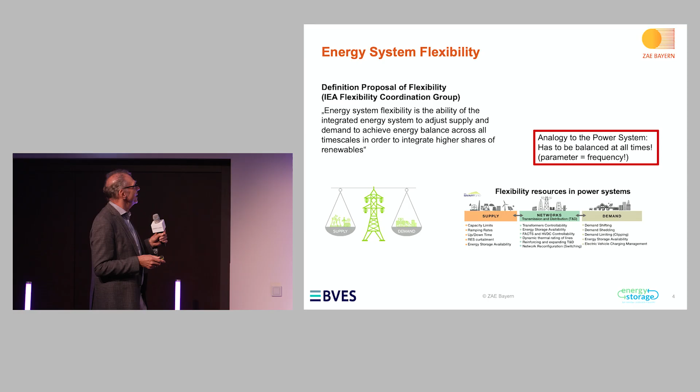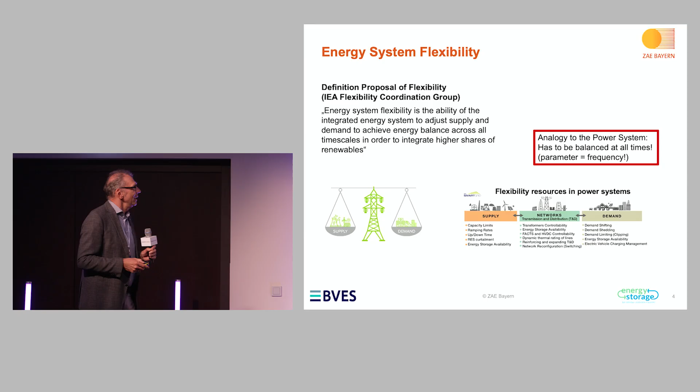But now I want to talk a little bit about flexibility and storage in the system. Actually, I'm leading a group in the International Energy Agency about flexibility in the energy system, and we try to have a kind of definition for flexibility. And it says energy system flexibility is the ability of the integrated energy system to adjust supply and demand at all times and achieve an energy balance across all time scales in order to integrate higher shares of renewables. So that's very much in line with the definition of flexibility in the electricity sector, where you also have to balance it all the time.

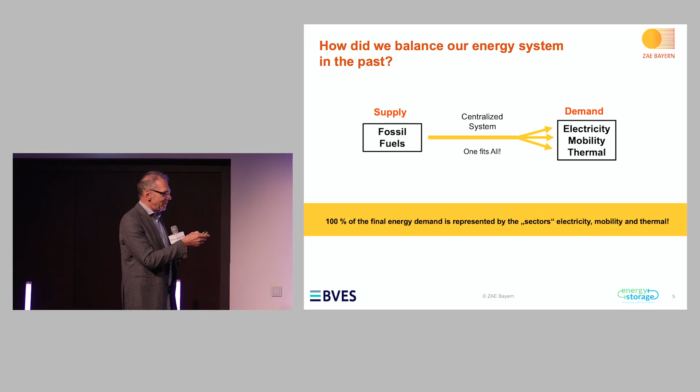In former times, it was quite easy because we had a system which was based on fossil fuels, so one solution fits all, centralized systems in order to provide what is needed in the demand sectors here, electricity, mobility, and thermal. In the future, it's much more complex. We will have renewable energies, and renewable energies also have fluctuations on the supply side, and then we have PV and wind, which is probably the main input in the future, but we have also others. And so that means we have to have decentralized systems. We have to provide these streams for the demand sectors. And the demand itself is also fluctuating. So that means a huge diversity to provide actually what is needed.

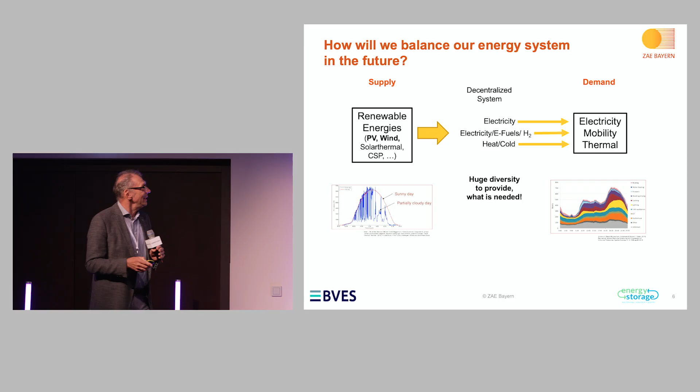So if we are not able to provide what is needed at that time, at that place, we have possibilities for flexibility. We can adapt the supply, but that is difficult if you talk about renewable energy sources. So they do what they want. And we can manage the demand, maybe. Also, this is limited. And then there are three things we can do in between. We can change the location. So this is about, for example, the electricity grid. So somewhere else you might need energy at that time.

We can have a shift in time. That is exactly what we talk about here today. That's storage. Or we can have a shift in the energy form, and I will talk about that a little bit later. So we can transform, let's say, electricity into heat. So this is power to heat or power to fuels and other transformations.

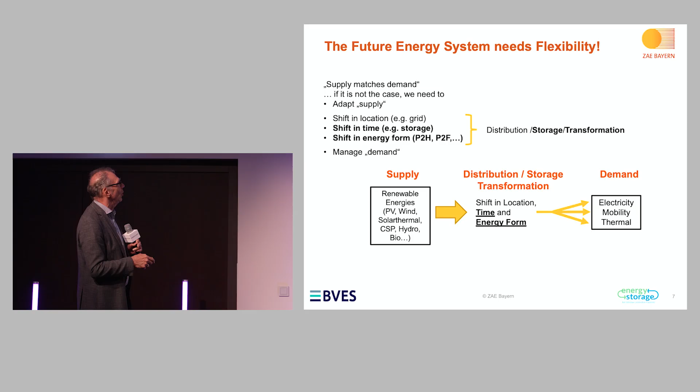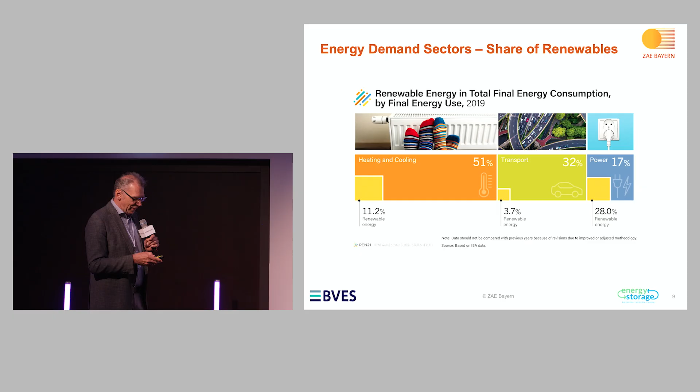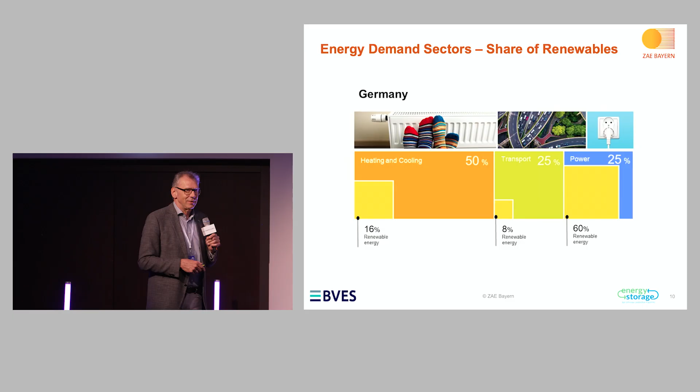Interesting is if you look at the demand side of the energy system and you do it in a global perspective, then you see the share of renewables today is quite high if you look at the power sector. So this is global. 28% are renewable electricity. But if we look at the transport and the heating and cooling sector, we see that we have a much lower share of renewables. And it's even more extreme if you look at Germany, where now over 60% of the electricity comes from renewables, but only 16% renewables are in the heating and cooling sector, and only 8% in the mobility sector.

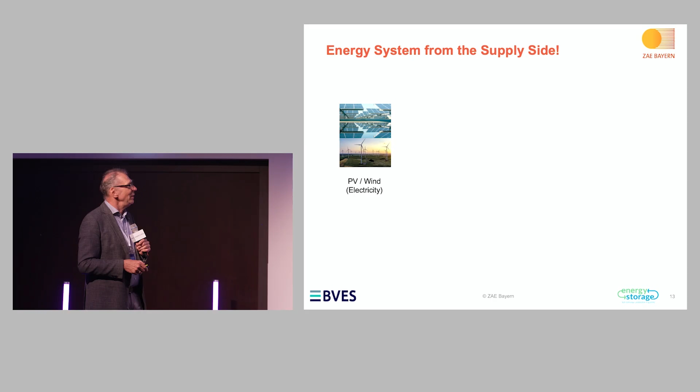So energy storage, within this group working in the International Energy Agency on energy storage, we try to talk about this. Think energy storage from the demand side, and I will try to illustrate this with an example. So in general, you have a source, you bring this to the storage, you have different storage technologies, I will talk about it in a minute, and then you provide what is needed. So let's say we have an example, we have PV or wind electricity, we store it in a battery, and then we provide energy to a very specific example.

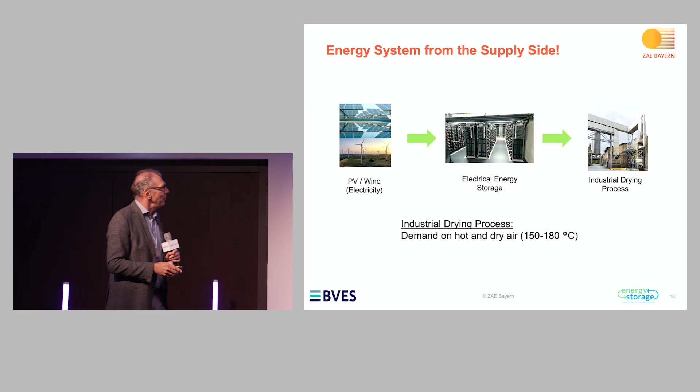So I picked one now, and I said, okay, I want to look at the industrial drying process. Electricity can provide, let's say, an electric heater, and you can do the drying. But if you now turn it around, so this is a drying process, I said, okay, it's maybe around 150, 180 degrees. If you turn it around and say, okay, I want to pick the energy storage solution according to the demand side.

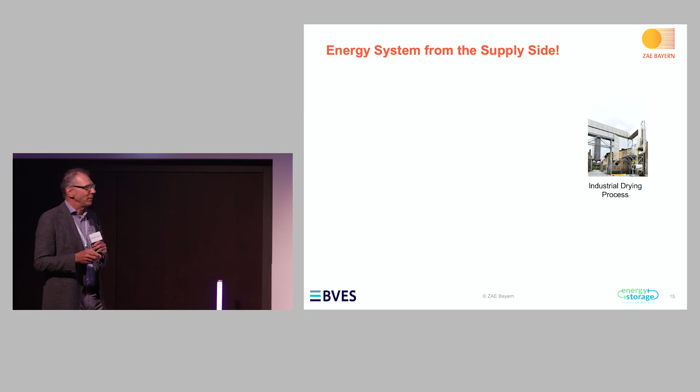So then again, I start with my drying process, and then I have a very exotic storage technology. It's sorption storage, thermochemical heat storage, and it's mobile. But this storage provides hot and dry air, okay? And I can charge it with electricity. I also can charge it maybe with a thermal source, like solar thermal or waste heat. And the interesting thing is that this technology is much cheaper than a battery.

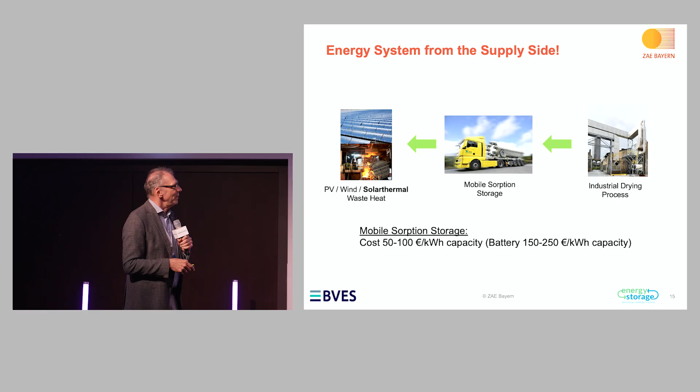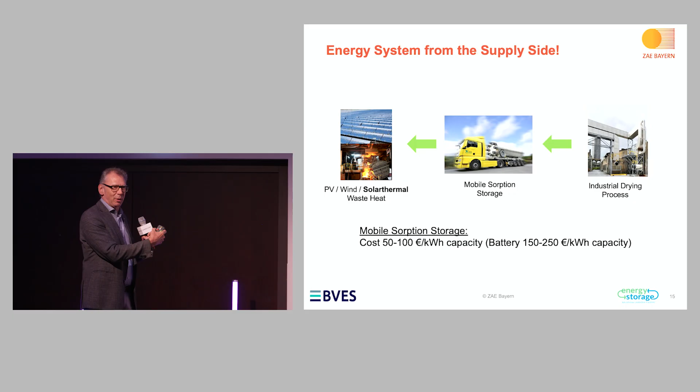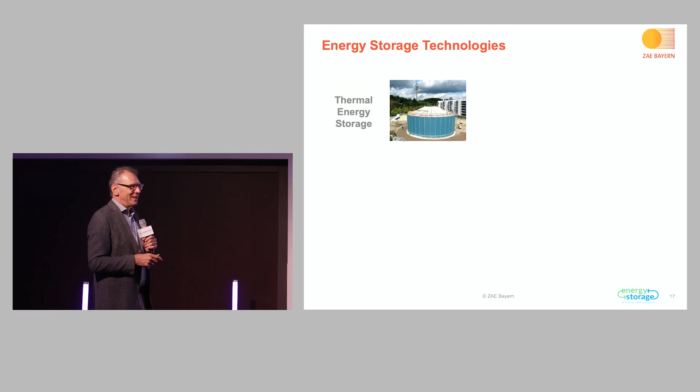So what I want to say with this example is really look at what you need in the end and not automatically provide what is coming from the supply side. So now I will briefly go through the storage technologies. In general, we have thermal energy storage. This is very interesting. This is a seasonal hot water storage for heating some houses really across the Olympic Park here. So it's very close to here.

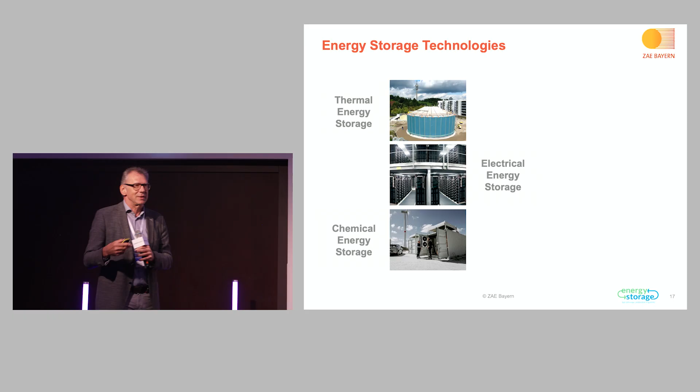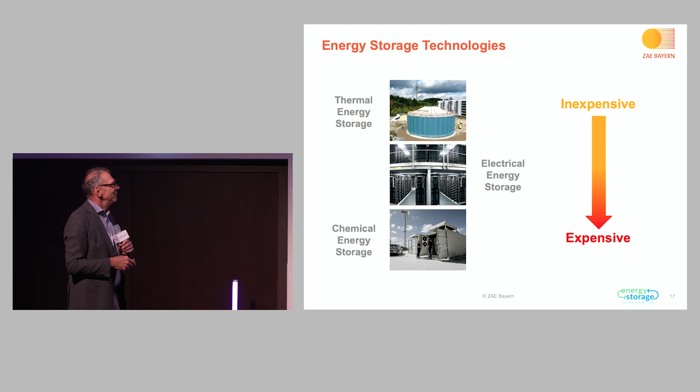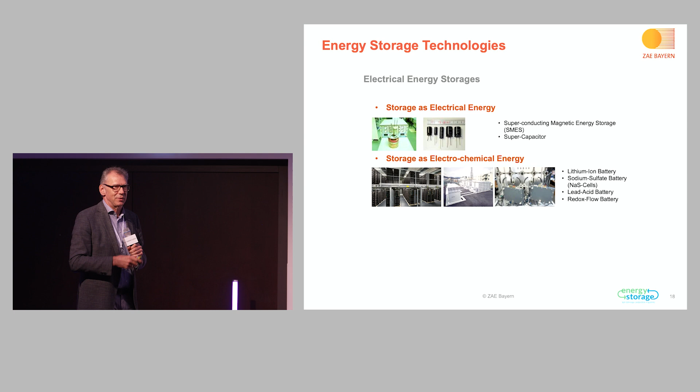We have, of course, electrical energy storage, and I think this is the main topic of today. And we have chemical storage. So that is all related to, let's say, hydrogen and other things. As I said before, thermal is in general less expensive, and maybe hydrogen is the most expensive. For electricity, we can store electricity directly, so that is also exotic, I would say. Then we have the electrochemical energy storage, so this is batteries and everything around it.

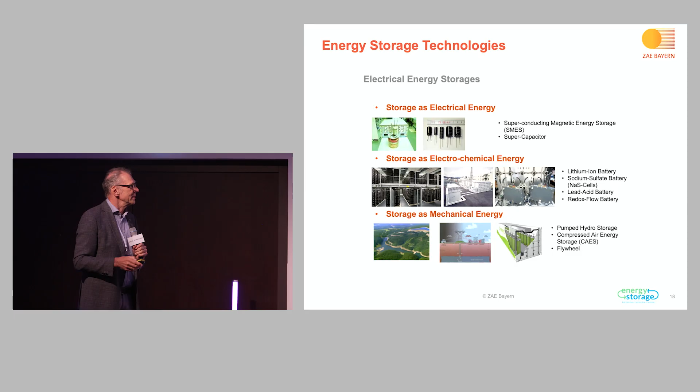And then we have mechanical storage, we call it. So this is pumped hydro, basically. It can also be compressed air or flywheels. If we look at thermal, we have sensible, so that is really heating up or cooling down something, like hot water, very cheap, very effective. Then we have latent heat storage, if we have a phase change, so that is an ice cube, for example, very simple. And we have these thermochemical, I mentioned before, so let's say more complex and more expensive than hot water, of course.

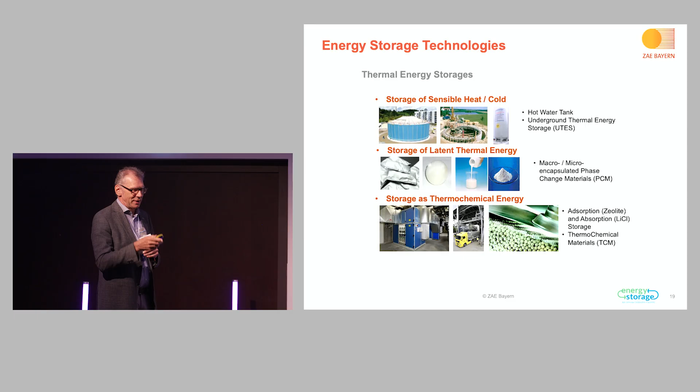And then if you look at the chemical energy storage, then we have everything with hydrogen, electrolyzers. And we can derive from the hydrogen, go to methane, so treat it like natural gas, or we have synthetic fuels, things like that. So now I would like to talk a little bit about this, what I call transformation in the beginning. So when you go from electricity to another form of energy.

So this is a picture here. This is the electricity sector. That's the heat sector. That's the mobility sector. And the main input will come from PV and wind as electricity, and we see it with the numbers of renewables in these sectors. So the highest share is, of course, here. And if we want to decarbonize the other sectors, we have to transform the electricity into heat or into mobility. And by doing this, we can introduce here storage capacities according to the needs of the demand sectors. For example, here chemical energy storage, so this is synthetic fuels, or here thermal energy storage.

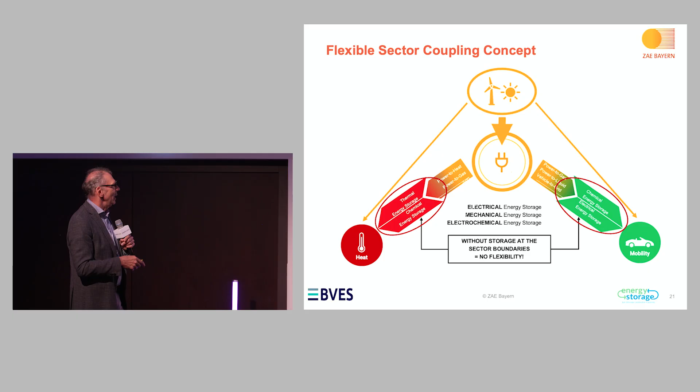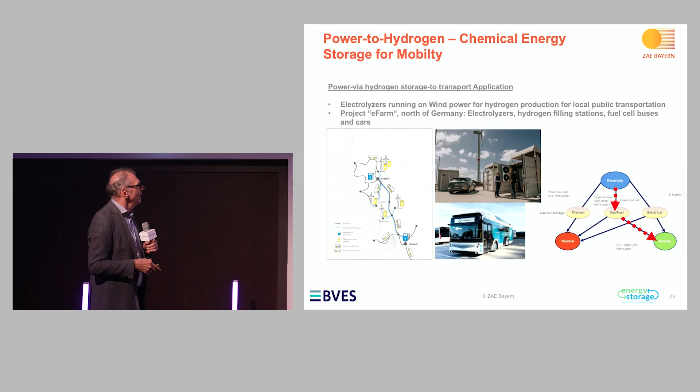So that's very interesting because I think in the future we have to adapt the charging infrastructure to the situations we have to face. For example, if you have a rock festival at Nürburgring, and I don't know, 30,000 people want to leave after it's over, and they all go to the first charging station at the highway. They will take a week to get home. So it might be interesting to really provide charging stations where they are needed, so mobile, for example.

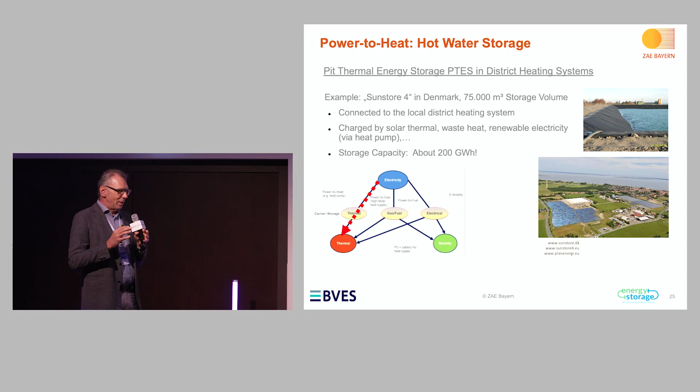And the last one is what I talked about, these large hot water storages. So that's very interesting because if you look at the whole system, the energy system, you can provide these incredible high amounts of storage capacity, 200 gigawatt hours. So that's a kind of artificial lake, hot water. It will be covered with an insulation, and it is connected to district heating systems. It can be charged by electricity, by waste heat, by solar thermal, so different sources. So that could be an element of the future energy system, providing a lot of flexibility.

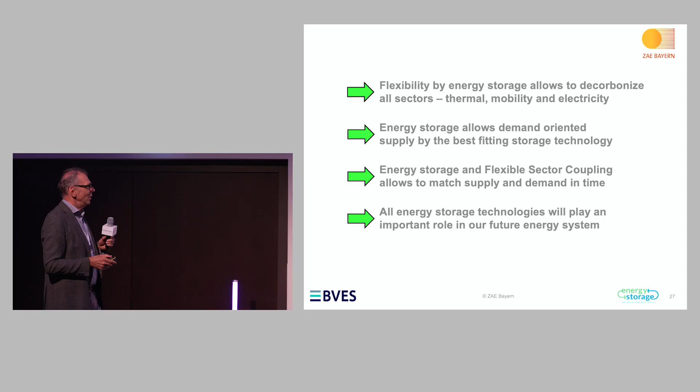Yeah, so I come to the conclusions. Flexibility by energy storage allows to decarbonize all sectors, the thermal, mobility, and the electricity sector, of course. Energy storage allows demand-oriented supply by the best fitting storage technology. So what is needed, energy storage and flexible sector coupling, this is what we call this transformation, allows to match supply and demand in time, and all energy storage technologies will play an important role in our future energy system.